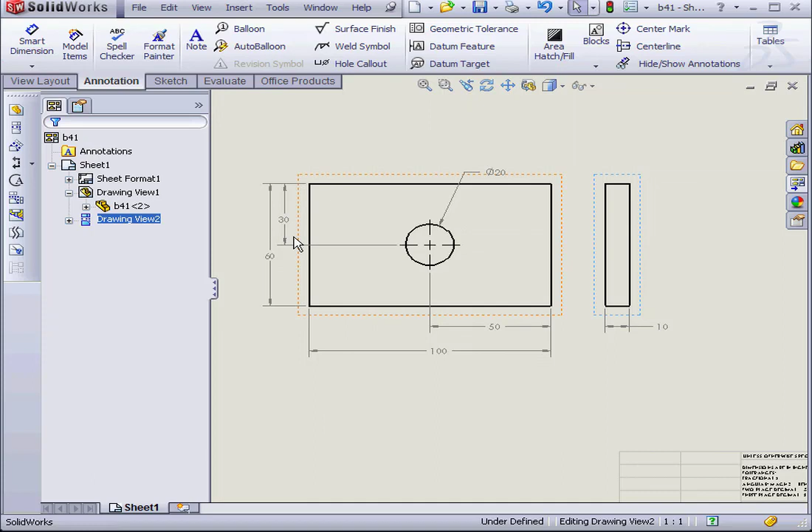Under Save As Type, you choose Detached Drawing. Let's give it a different name. I'm going to call it B41-D. Notice that the detached drawing and the drawing have the same file extension. Let's click Save. Now let's close our drawing and our model.

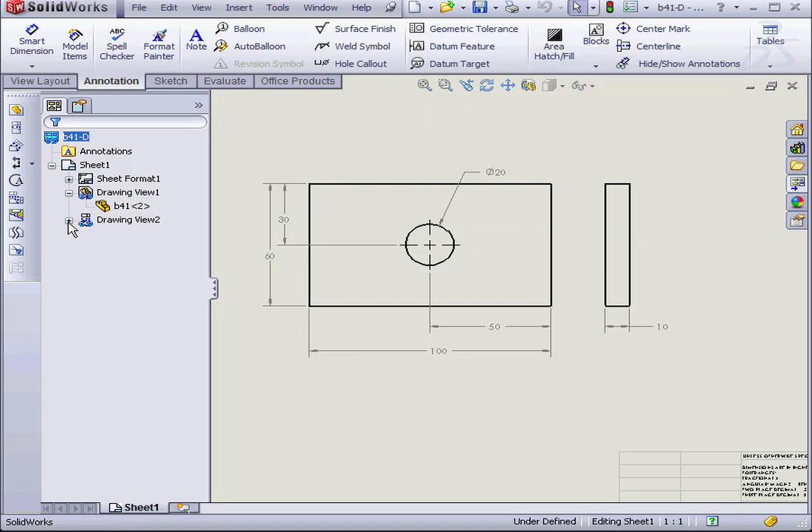Go back to File, Open. We've got the option to load model down below. Let's leave it unchecked and click Open. The icons here on the side indicate that we're working with a detached drawing. Let's close our drawing, and we'll open our model next.

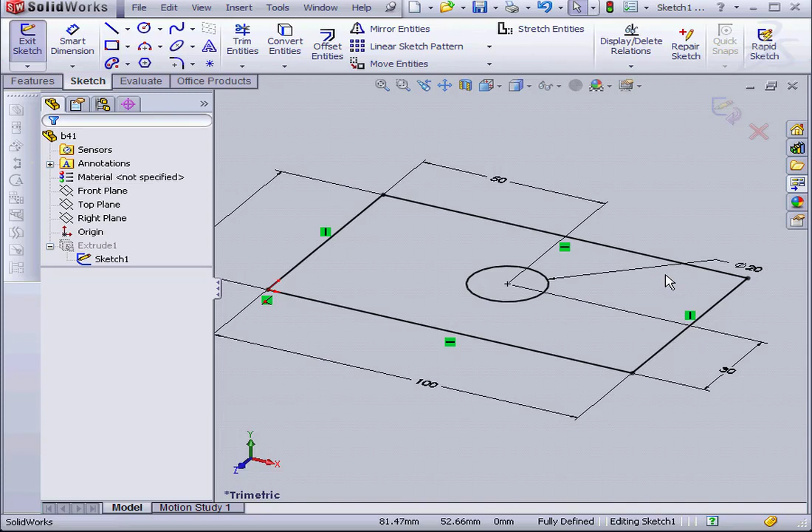Open. Let's make some changes to the model. Oops. Let's close that. I need to open my part. There we go. Open. Okay. Right-click, Edit Sketch. And let's change it to 40 millimeters. OK. Exit the sketch and let's save the document. And close.

Now let's go back and open my detached drawing. Select it and click Open. We get a warning from SOLIDWORKS: the sheets contain drawing views which are out of date with their external models. Let's click OK. Notice the hole here is still 20 millimeters in diameter.

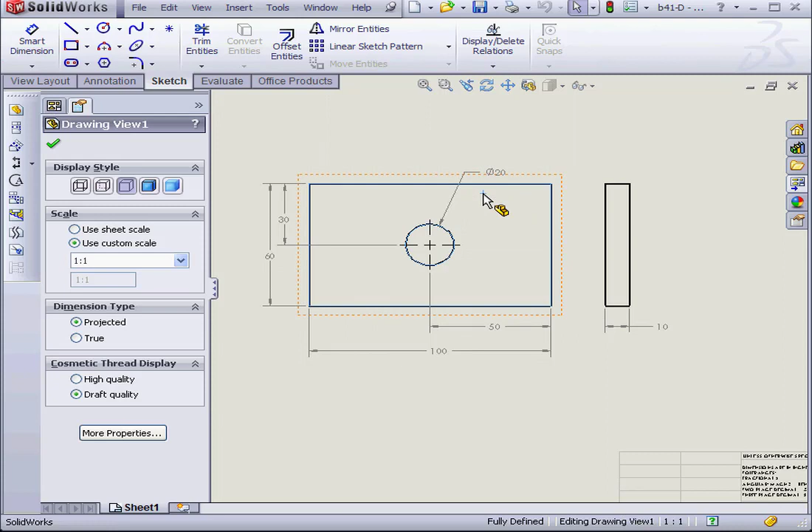Let's right-click on View. Select Load Model. SOLIDWORKS lets me know that loading the model might be a lengthy operation. Let's click Yes. As you see, the drawing is updated. We'll close and save. Now let's reopen our drawing again. Open. And everything looks fine now.

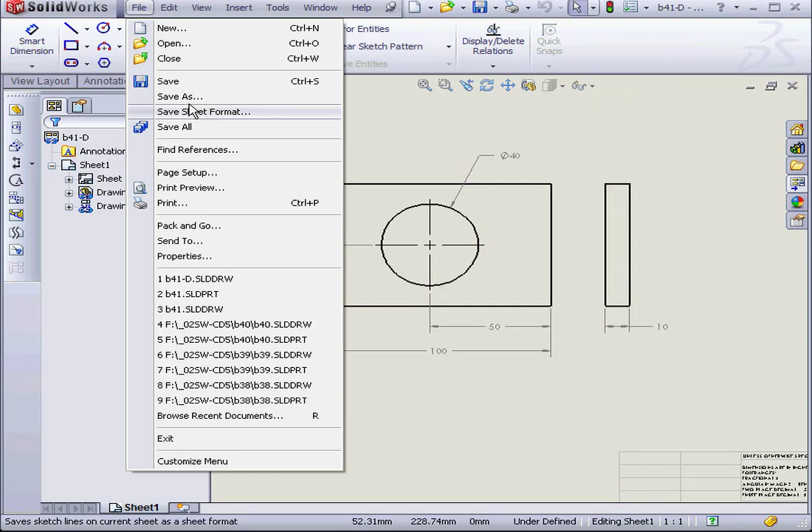I'm able to reattach my drawing to the model if I want to. This time, if I want to do that, I would select Save as a regular drawing rather than as a detached drawing. Rename the file and click Save. Loading the model might be a lengthy operation. Yes, I do want to continue. Let's close the drawing and let's go back to the Open dialog window. Let's click Open. And this concludes our tutorial about detached drawings.